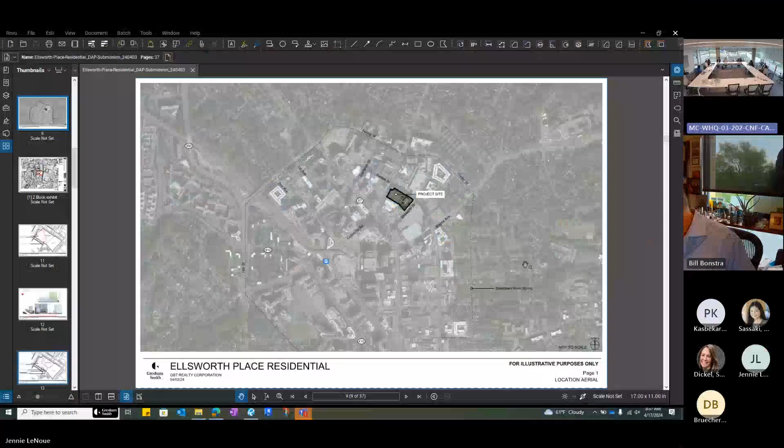I didn't realize you were also in the meeting. That works out, just make sure your sound stays off or it gets crazy. Yes, awesome, then we're good.

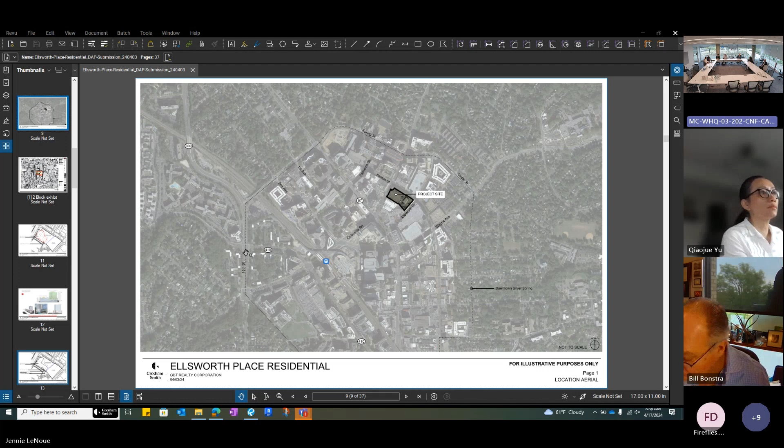So we can go through those quickly and then get to the revisions from the last time that we met with you. Again, just the aerial project site location in downtown Silver Spring, and a site plan showing that 2-block radius with the updated tower footprint.

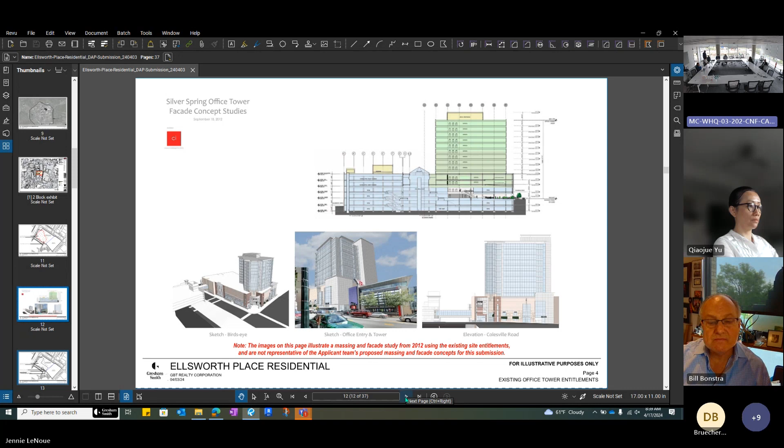Same sheet from before, showing what was previously explored for the office tower. This overlays the new footprint for the revised massing. Again, on top of the structure, you can see how we're interacting with and using as much of the existing structure as possible for the tower.

And we've identified the tenants that exist in these spaces. I know there are restrictions with regards to agreements with the tenants about what work can be done within the space. So our tower massing scheme relies heavily on using the existing structure that's there and what is available for the capacity of that structure.

There is a column towards the front of the building which we believe will be able to support some additional skinning as we bring that tower mass down to the ground. But again, that one does not extend above the structure.

We did engage a structural engineer in this last phase to make sure we understood what we were showing with regards to this extended mass and the cantilever we'll explore in a minute, and whether it was possible. What we know from him is, based on what we're showing, there is a limited amount of cantilever possible without getting into the existing structure of the building. But obviously further study is needed as the design progresses.

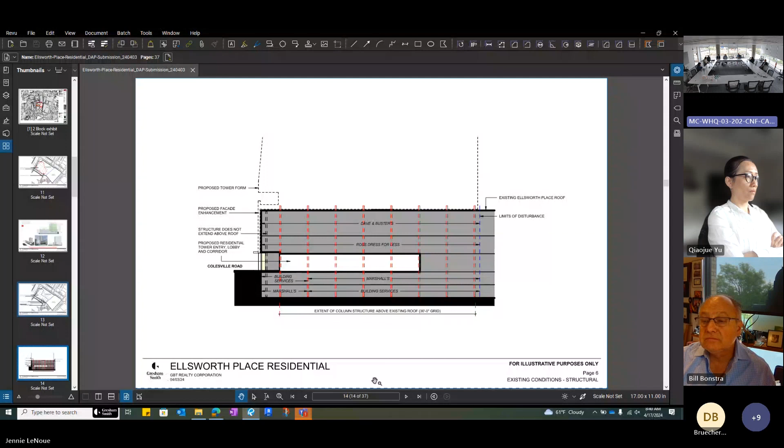This shows, similar to the previous submissions, the allowable height based on the full boundary of the building, showing the 300-foot allowable, the prescribed recommended step backs, and where our proposed massing lands.

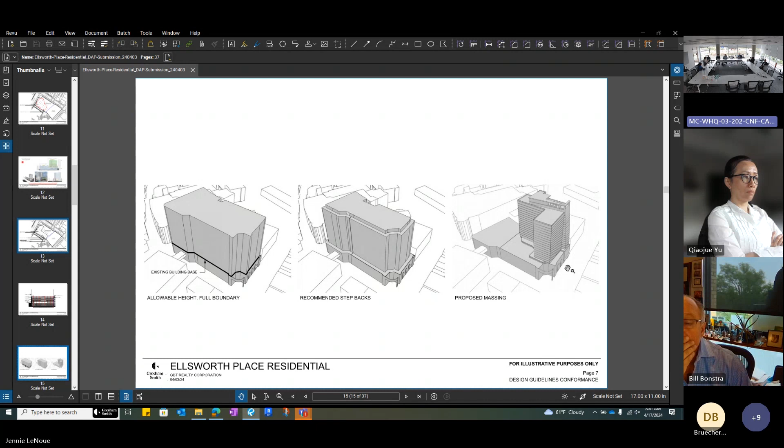We have maintained the L shape of the tower, squared off the corners, gotten rid of the rounded edges we discussed last time, and made a stronger gesture at the entrance to the residential tower by bringing out that leg — basically a rectangular volume — extending it up and having it wrap over the L form of the residential tower.

On the ground plane, it looks very similar to before. This dashed line is the revised tower footprint above. But the street-level experience is very similar to what we discussed last time, with emphasis on the residential entry through some sort of skin expression on the outside.

As we move up, you'll see we're making a small gesture towards that subtractive corner, with the building reaching out as you start to experience the volume of that tower moving into Ellsworth Place at the corner there.

This is the first level of the residential tower, programmatically very similar to last time — a lot of resident amenity space and adjacent outdoor amenities to activate both the Colesville Road and Fenton Street sides. At the amenity area, we're pulling that facade back from the tower mass above to create a subtractive acknowledgement of how the existing building meets the new tower.

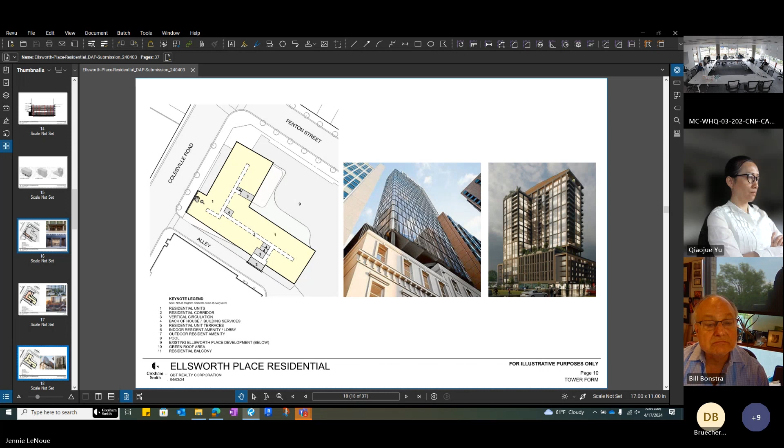We're considering this our typical tower footprint. The one thing that's not typical is that the side facing Colesville Road has essentially a zero step back at the ground plane and slopes back as the tower rises. So this face slowly peels its way back from the street, but this is essentially the L shape of the tower. As we get towards the top, we actually have this expression extending above the L shape.

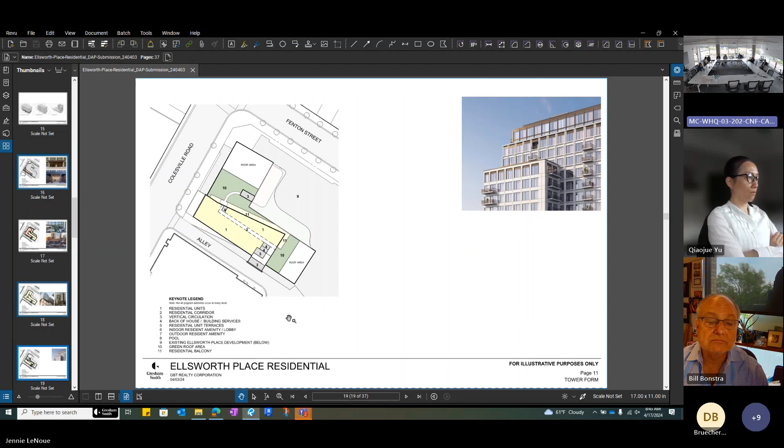This is still a purely residential floor. There are some green roof outdoor spaces, and that starts to separate this volume from the L shape. Once you get to the very top of the tower, this is now purely an amenity floor. We've relocated the pool from the back alley side of the form up towards Colesville Road, so now you have much more activation from an outdoor standpoint along the public side of the building.

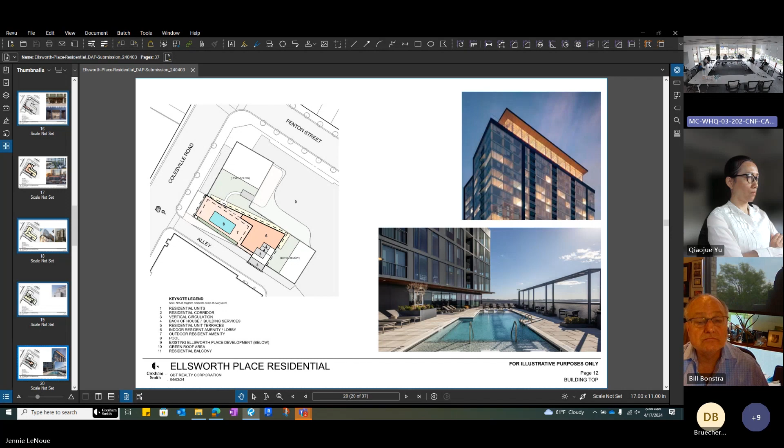This is just quantifying what those step backs are. Again, we're at zero at the mass as it hits the ground, and that slopes back gradually all the way up to the 25th floor. There's a step back at the first level of the residential tower that hits the existing building roof, and the level above that is where it kind of reveals itself over that subtractive corner.

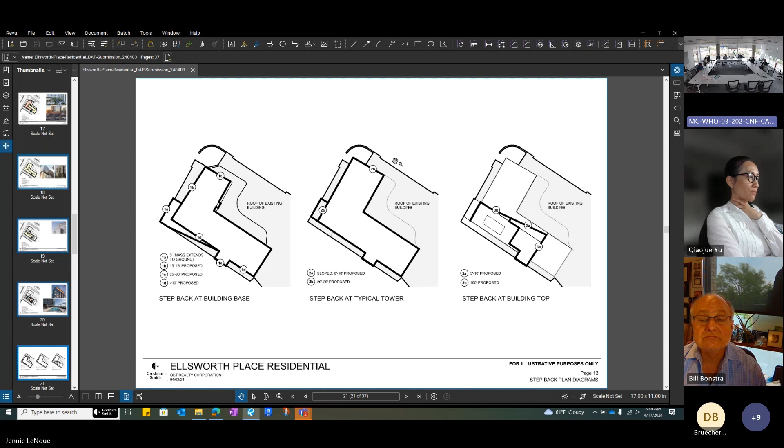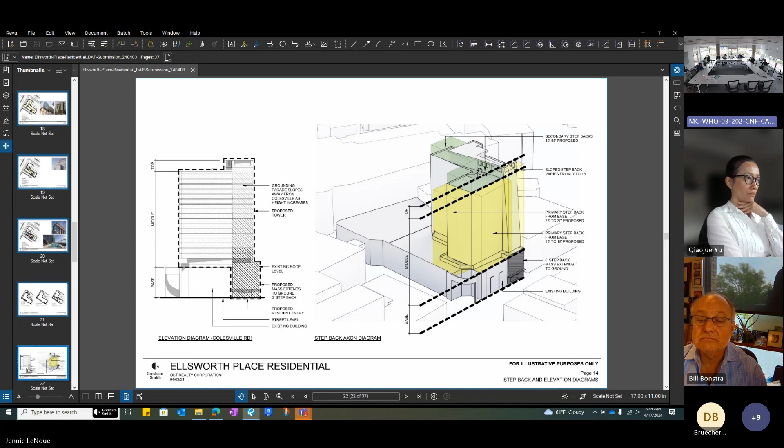Updated diagrams similar to what you've seen before, just showing how, based on maximizing that footprint, we start to peel away and reveal, acknowledging the prescribed step backs of 15 feet. But we've also heard that there may be some room, given existing conditions, to play with what that looks like, and that's where this sloped face comes in. It gradually works its way back, and then we have these larger step backs up at the top to emphasize the vertical gesture grounding the tower, and also to provide rooftop space for adjacent residential units.

The revised mass in context, and then again that overlay with the allowable heights. These are just that sketched mass overlaid with the existing conditions. They're not necessarily scientifically precise, the angles aren't exactly right, but we're just trying to show how we're bringing down that mass, emphasizing that entry, and what the tower looks like in context.

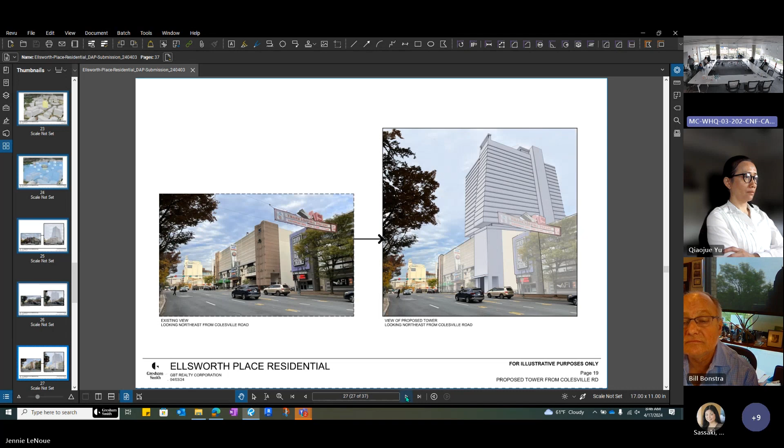So this is looking northeast from Colesville Road. Another view of that main entrance, along Fenton Street, where again you start to see that inside corner of the L shape. And this is at the intersection of Fenton Street and Ellsworth Drive, on the back side of our tower.

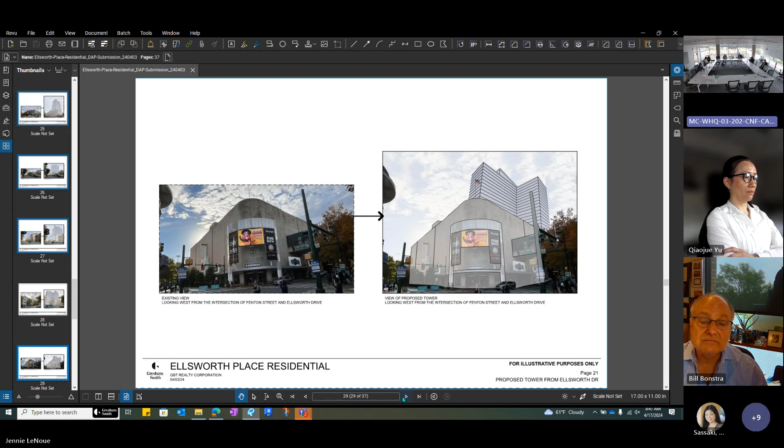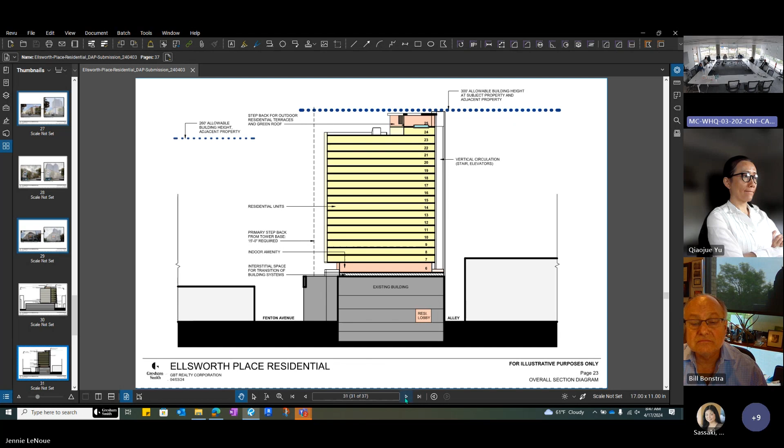Some diagrammatic sections that start to show that relationship to the street, to the subtractive corner. And then this section cuts through that residential lobby and shows how we're peeking out beyond that subtractive corner in the facade of the Ellsworth entry.

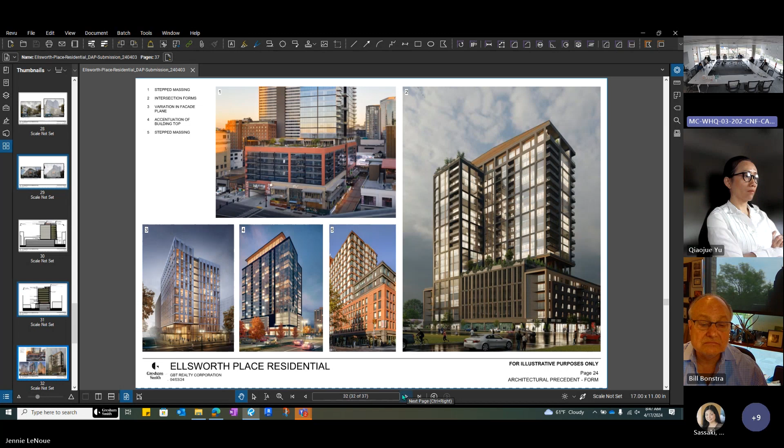A lot of this precedent imagery you've seen before, on our form now with the piece that starts to wrap the top, creating this lantern effect and cap on the building that wasn't necessarily as expressive before. Very similar patterns and fenestration, things we'll continue to explore as the design progresses.

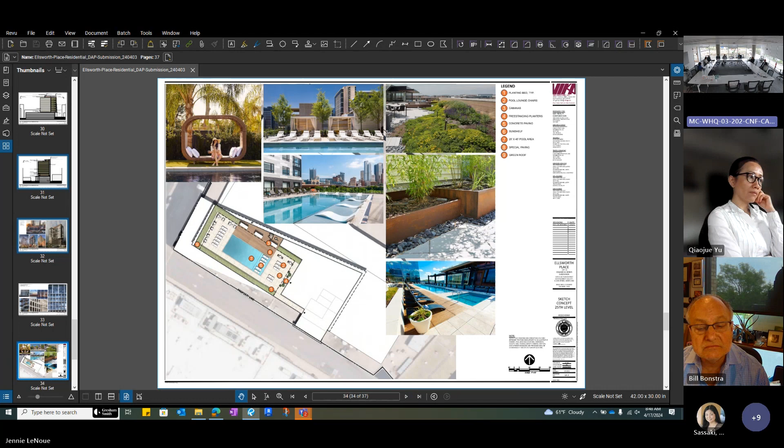Also, as part of this package, we've included some landscaping concepts from VIKA. These look at what the pool deck might look like at that top level, adjacent to interior amenity space, giving great sun exposure for the pool itself, views south to DC, and a place for residents to relax.

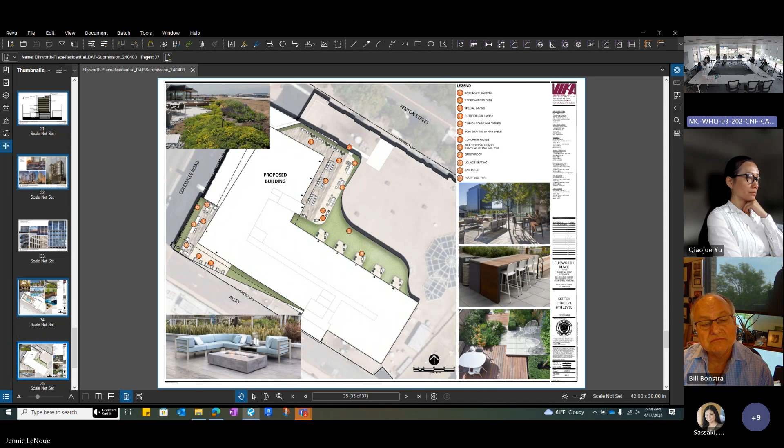At the roof level, the existing Ellsworth Place roof level, you can see patios adjacent to units, outdoor amenity space that supports the indoor amenity space and helps activate these edges. And this corner along Colesville where it meets the alley would also have outdoor occupied space.

Down at the street level, this starts to identify some maybe paving changes, paving treatments, and identifying some of the trees and sidewalk areas to remain.

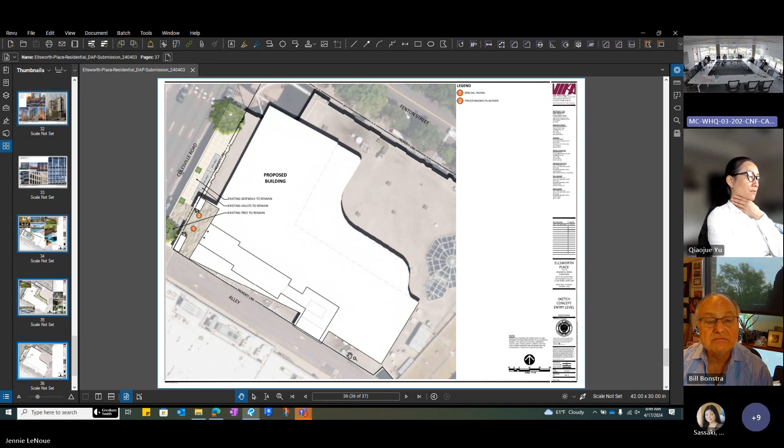This may be slightly out of order, but this is the level just below the top amenity level that shows a lot of that green roof and patio spaces adjacent to units.

So that's the package in its entirety. I think our focus was really on grounding that corner of the tower, cleaning up the mass in a way that felt less bulky. What we heard before was that it was competing a bit with the bulkiness of the base, and that's where making that separation comes in, like it's here.

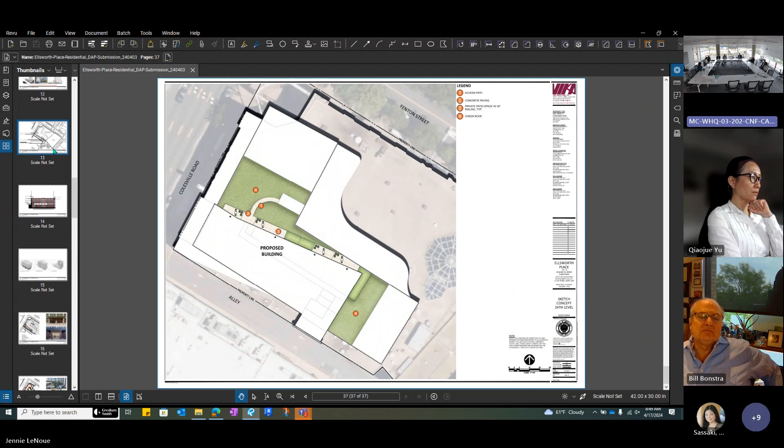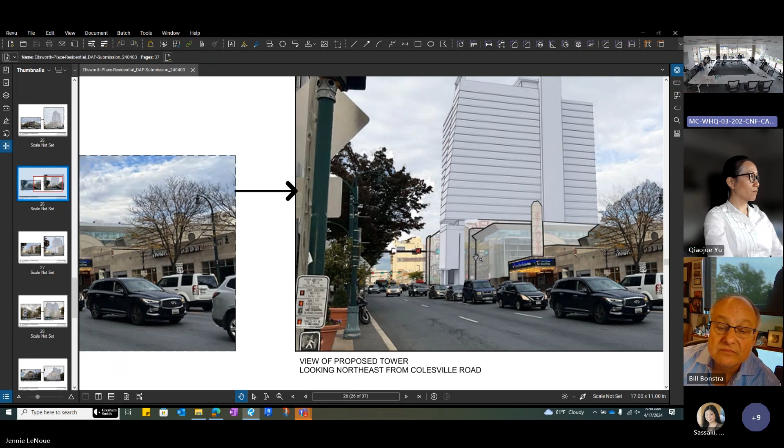Making the separation, the recess, that break between the roof, the existing roof level, and the story that's above that roof level, having that reveal, and having people inhabit that space as well. Make it a space that's occupied both inside and outside, to help create that separation and acknowledge the difference between these two, but have them work together.

So, get a perspective view looking from the north, from the street. Can you show that one? That one. This one. Yeah.

Yes, yep. I'd have my DAP members go first, but I'd like reactions to this versus the last presentation. I'd be happy to go first.

I applaud you for your efforts to respond to our previous comments, so thank you very much for that. My only point would be, as you continue to develop the design, anything you can do to make the north-south bar more dominant to the east-west appendage, the stronger I think the design would be. I think you've made great strides from the last time. In fact, when I reviewed the package earlier this week, I was like, well, what did they do? And then I saw the revised version this morning. So I want to commend you for that, but I also want to emphasize that, to my way of thinking and what we've been trying to communicate these various times, is the north-south bar should be more dominant.

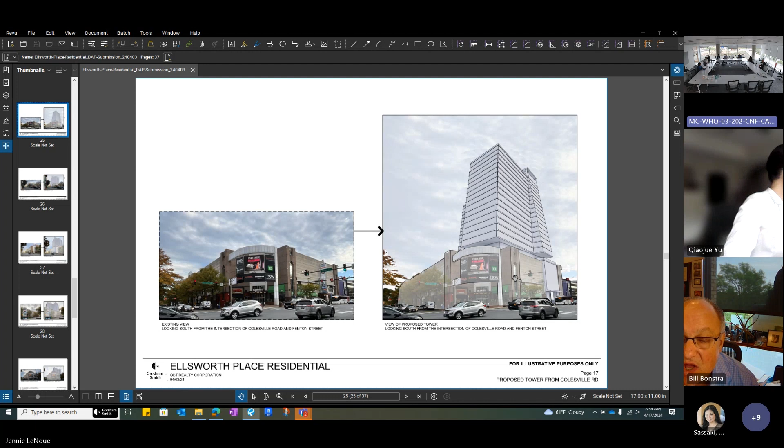I think the lantern, the top of this building, will be incredibly important because this height is a new height for Silver Spring. So how we can really emphasize that moment and celebrate it when you're looking from the metro, this is going to be such a prominent moment for downtown Silver Spring. When you enter from the metro, you'll see it right there.

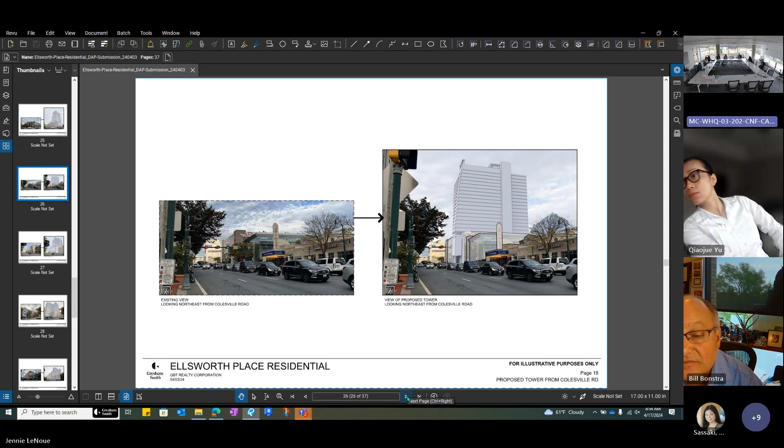So from this side, you start to see nice articulation from the lantern. But when you look at it on the other side and the other view, maybe the next page, I think thinking about what's happening here, what's happening on the roof, how that piece you were talking about sort of glowing, you can see it in some of the examples. I think those will be great precedents to refer to as we're thinking about what's happening there.

My only other comment, and I'd like to hear from other members of the DAP on this one, is when I saw the plan and the cantilevered bar of residential over our wonky corner, I was very skeptical, because when you're standing under that and you look up and see a massive 300-foot tower above your head as you're entering the mall, how will that feel?

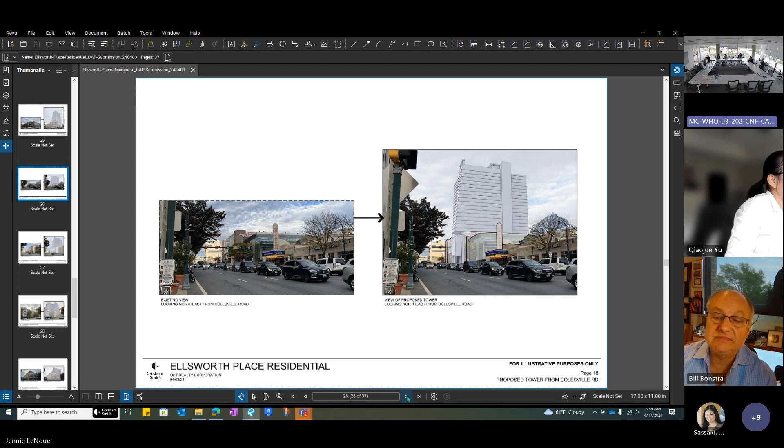I think that view we were just looking at does a good job, because you're recessing the level below it. I feel more comfortable here because it's separating it from the ground floor. So while I was nervous when I saw the plan progression, when you see it in the view, I feel a lot better about it.

But I'd be interested to see and hear from the rest of the DAP members what their thoughts are. And then also I'd be interested to hear from this team, are there plans to do anything about that corner on the ground level? Does the mall have any plans for the ground level? I mean, I know that would be a separate sort of thing, but...

It's a very challenging piece of downtown Silver Spring. But I think you resolved it well, ultimately, and you can tell from this view. So I concur. Okay, can I go next?

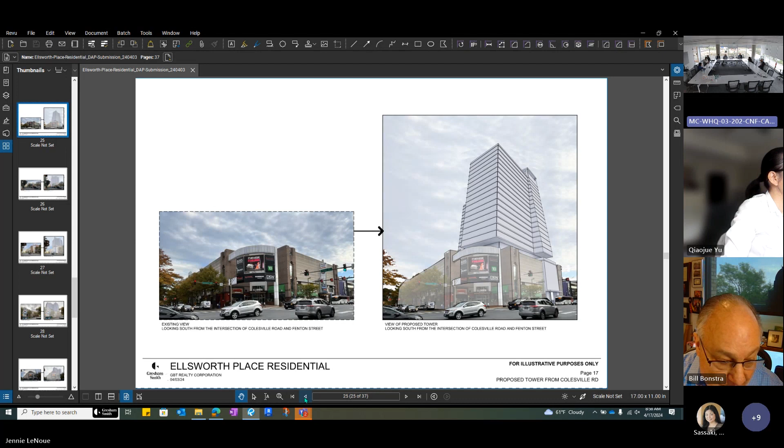No, that's not correct. We're not able to add additional columns that will support load above the roof of the existing mall. So we can support any fenestration that's on the mall itself, but on that corner, we can't. That's kind of why we had the cantilever sloping back, working with the structural engineer.

That was kind of responding to the comments from DAP and also satisfying the structural hardships of the building. So you really couldn't, on one floor, have a lateral transfer truss that picks that up and transfers it to the existing columns?

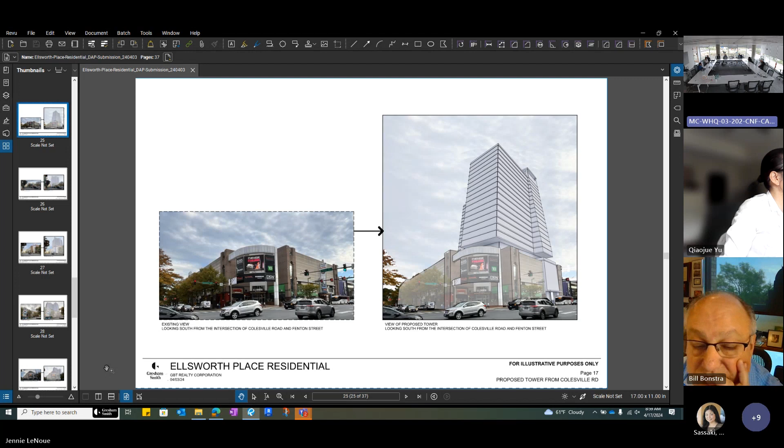It's quite challenging with the structure that's already in the building. We were challenged, and we had to work extensively with the engineer to try to figure out an option just to create this mass, to be honest with you, Bill. Right.

And does that corner need to project over the entry the way you have it, or could you put another appendage, so to speak, that runs north-south along the left side of that bar to give you more floor area, but back from the curve?

I don't know if we could go any further towards Colesville. Is that what you're saying? Appendage towards Colesville? No, appendage back to the left, bring that corner—I'm a little troubled by that mass floating.

There's nothing that ties it into void. Yeah, David mentioned the void at what we call level 5, right above. Yeah, is that what you're speaking? Okay, well, you have that overhang there. That's not the void I was referring to.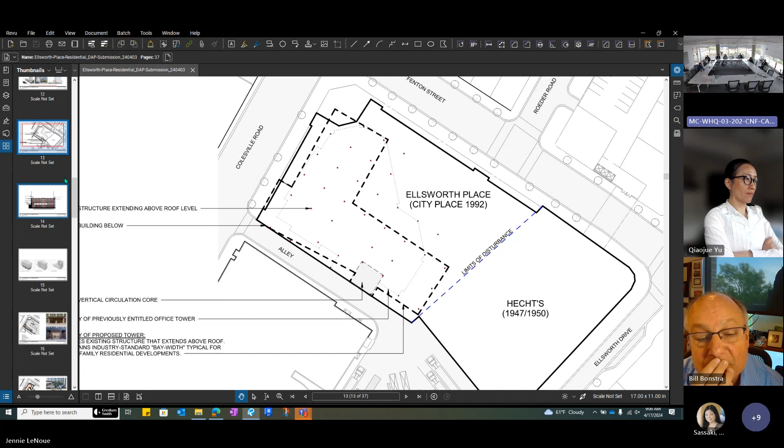I was referring to the void along Colesville. Oh, that, okay. Yes, right here above the entry, where the slope comes down—that recess is the one I was referring to. I don't mind having an outdoor space there.

I just think in terms of the way you develop the skin, you can get continuities there by punching holes into that rather than putting windows that allow it. I mean, that's an architectural opportunity.

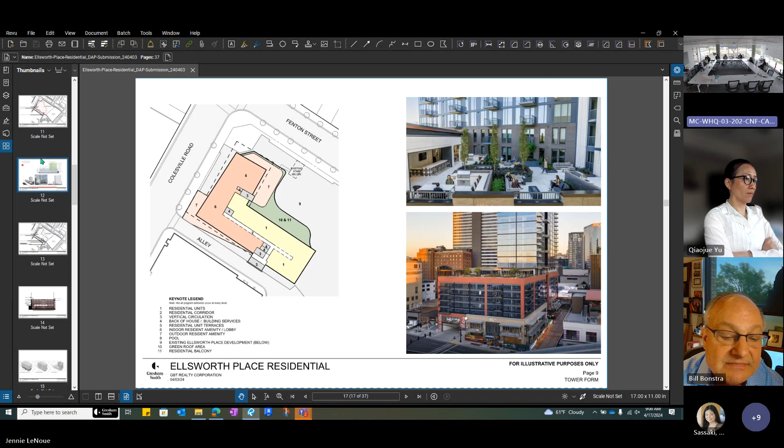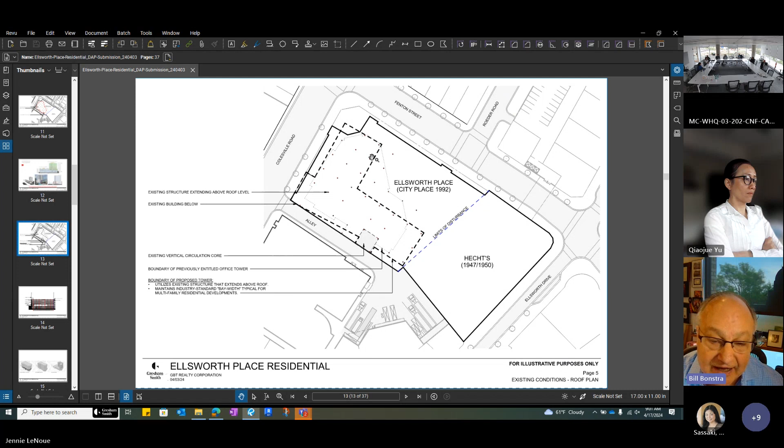So, Bill, can you clarify the corner you're speaking of? The primary corner projecting over and floating seems a bit profane to me. It would seem like that corner should stay tucked into the orthogonal building, and then you could have an appendage like what you put over the entry door running north-south, but not from the Colesville side, from the right side of that face. You see what I'm saying?

If you need more floor area, you run another floating bar down to give you more floor area, and pull that corner back.

You extend it towards Fenton. Yeah, there you go. And then have half of your residential bar continue without cantilevering over the void.

I think it's mildly troublesome to come in there with a building. All that building does is float, except at the alley. The only place it joins the ground really is at the alley where the core is. I would be worried - Alice mentioned the thinness of the building as you're standing at the northwest corner looking south.

If we widen that, it becomes more obtrusive, in my opinion. I know we are extending over that unique corner, but I think the uniqueness of that cantilever and the way we treat the bottom of that soffit could be an interest that is just part of that interesting corner, if you will. We don't know the commitment of the signage right now.

Sure, sure. My only point is you're not grounding the building except along the alley. Can you make some wing walls that ground it on the entry side that don't weigh a lot? Can you join that without cantilevering that appendage?

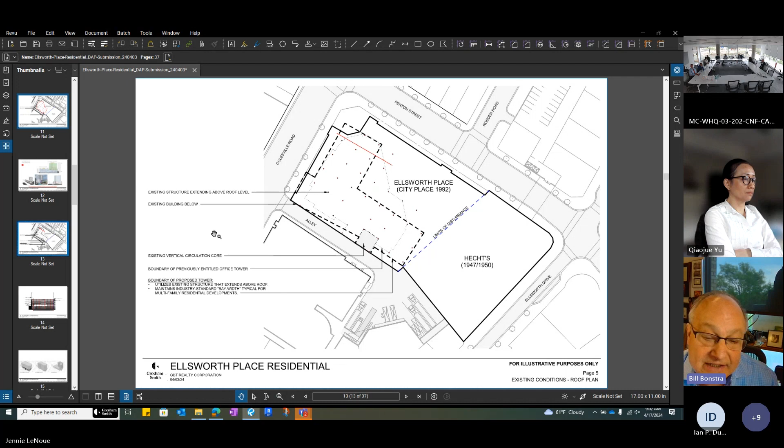Bill, are you talking about Colesville Road? The Colesville residential entrance - could that come up one floor higher and at least make a connection back and be plumb down to the ground? I mean, I don't want to design your building for you. I just feel like everything's hanging up in the air still.

I think one point that doesn't show here terribly cleanly, especially in the model - this is Ian at VIKA - is that the building is essentially on the right-of-way line. So we really don't have the ability to put anything structural in the right-of-way.

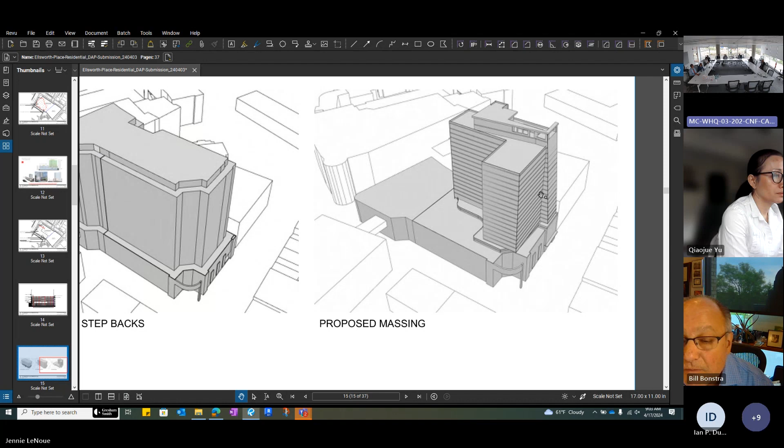Is closing up that void that David is speaking of - would that respond to your concern, Bill, on Colesville? There you go, that's the best view. You can zoom in on that thing.

It is hovering. Does there need to be anchoring on level, we'll call it level 6, right there where the cursor is? Well, it's sort of contradictory. I like David's comment about that glass and hanging it.

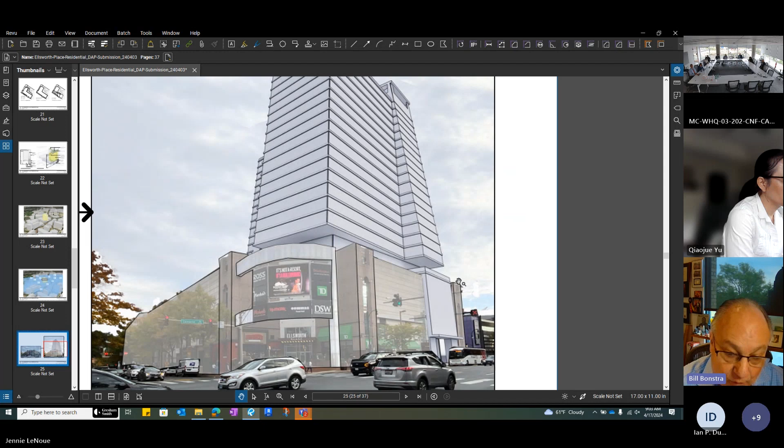So I was suggesting that the main bar not have a void underneath it and not cantilever, and be pulled back. But I'm not sure - these are big moves. And could you connect it?

Yes. Could you bring the entry along Colesville one floor higher or two floors higher? I think that would help ground that piece in some way. Because it's still floating above - it's a building floating above a shopping mall. You haven't accomplished the connection, in my opinion.

That's all I'll say. I think Bill and I are saying the same thing - it's just how you go about doing it. You can either go about it by raising the void one floor up, or find ways to enclose that void while still keeping it open and lively.

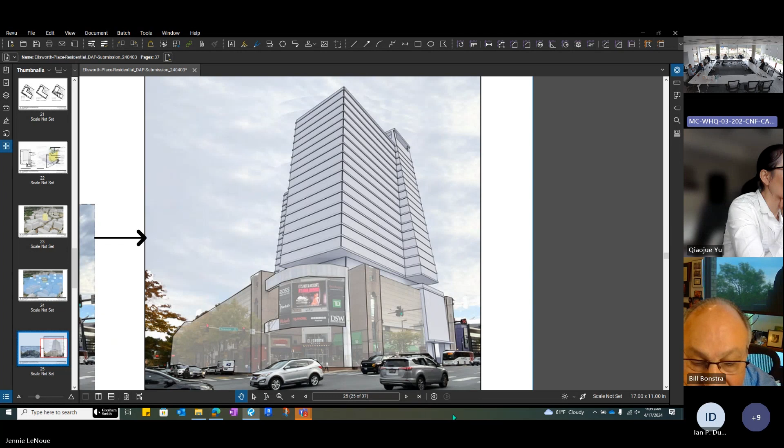I think there are many options there, but as I understand Bill's comment, what we're trying to communicate is that the north-south bar should be rooted to the base in some way, to allow the east-west leg of the L to feel lighter, subservient to that primary.

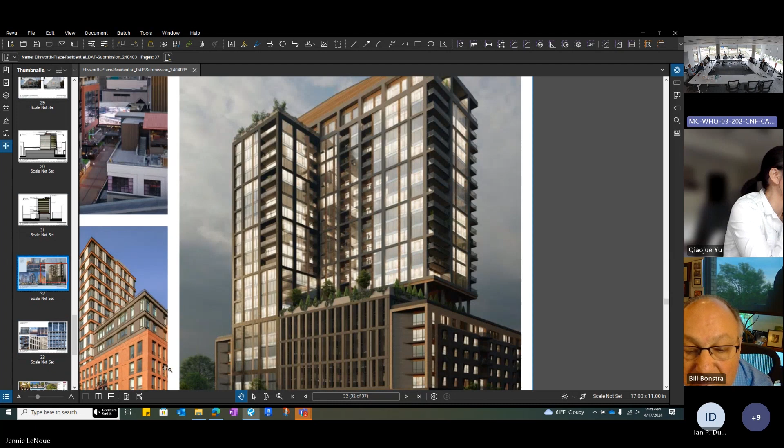If you go to your first precedent book, down a couple - I think it was that one. Okay. That big one right on the right side - I think that begins to speak to what's being said right now.

There is a part of that tower that is kind of floating, but there's also a portion of that tower that anchors to the ground. And I think right now that is not occurring in the design of the tower that we're looking at.

That's a great example right there of just what I think needs to happen. We've said we've liked that image a lot since the beginning - that was the precedent that I think we embraced as a diagram, right? It has to ground itself in some way, and it's still not doing that.

I like your comments, David, I agree with what you're saying. I like the glass maybe floating, but the body of the building has to somehow not float as well. Can't all float. Alice.

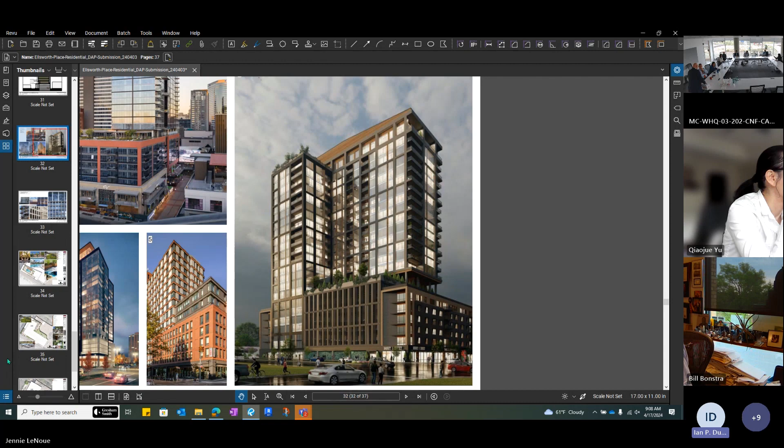We do have in the latest submission, which was on the 26th I think, an indication of what we were planning to do, which is essentially replacement of pavers at grade at the residential entry, to demarcate the new residential component that we are adding to this project.

So this will come back in site plan in more detail, right? Yes, okay. I think we'll defer a conversation on that so we can focus on the building massing for today, but we will have to come back to that during site plan.

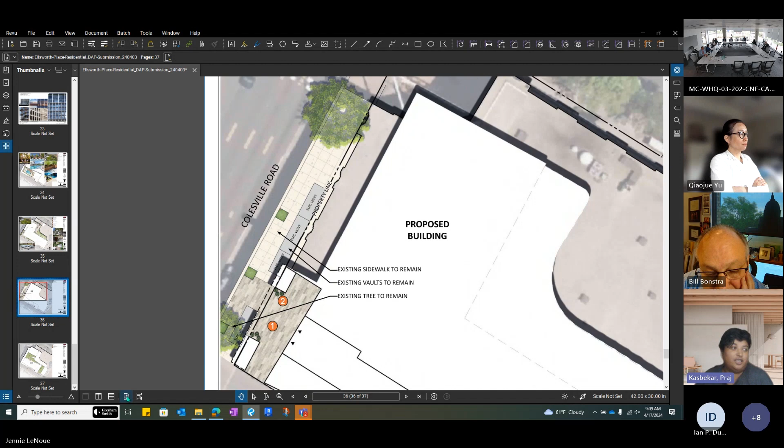Praj, do you have anything to add? Yes, I actually really like that it's floating. It's kooky—that whole mall is kooky. So for me, I think it's a little bit whimsical, and walking around it, I actually think it could be a great kind of more modern look to that corner.

Also, I want to echo Qiaojue's comment. At this level of the third submission, I feel like, thanks to the applicants, they have responded to a lot of the comments about massing, trying to have some individuality from the mall while also speaking with what's there. I think great strides have been made on the massing and how it looks off of Colesville and how it comes down the alley.

So for me, the facade play—I think after this stage, more of the skin treatment and what else can be done to respond to some of the concerns of the other DAP members could address those concerns. I was actually going to ask you: at this stage, we look at where they are and then what's our next comment. For me personally, I'm totally okay with this submission package, and of course I have comments about the massing and facade treatment, the design coming all together. But I personally like it.

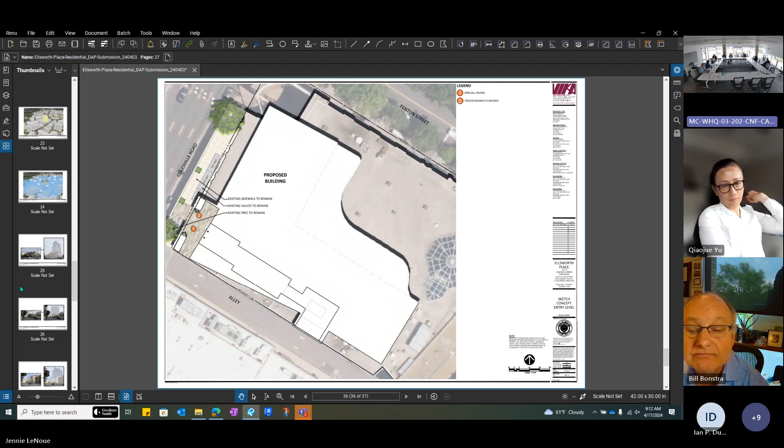For the sketch plan, I want to go back to the corner of Fenton and Colesville, because I think that's the piece Bill was commenting on. I wanted to clarify a couple things he was saying. As David mentioned, there's a number of ways to address the connection to the ground. We have a lot of challenges here because of the structure. But since you're remote, I drew it so I can sketch things and show them. Just what I think Bill was sort of talking about was...

Are you in the meeting? I'm not in the meeting. But you're sharing the screen, right? Maybe you can see, I just kind of sketched it, I'm not as adroit at digital as you are, Alice.

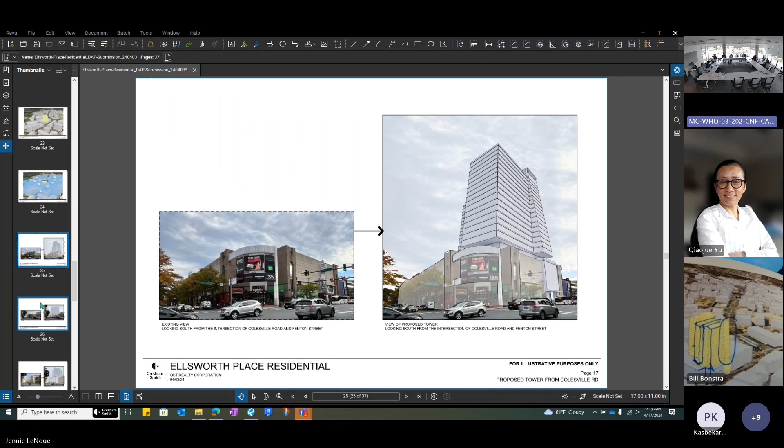So I do things with just a pen. That's what she did too, mine was just a digital pen, Bill. But it might be the same thing that we drew, because it's thinning out the tower going to Fenton, using that as your cantilever, and then pulling the cantilever off from floating over that entrance to the mall. Can you take a screenshot and email it to me? Can you see my sketch? Can I airdrop it to you? Yeah, there it is.

See, if you bring back the corner and create another, I mean, if you're creating appendages, and we're okay with that drawing. Your minds are alike. Plan, you did it in 3D. We're on the same page. Awesome, Alice, I know I like you.

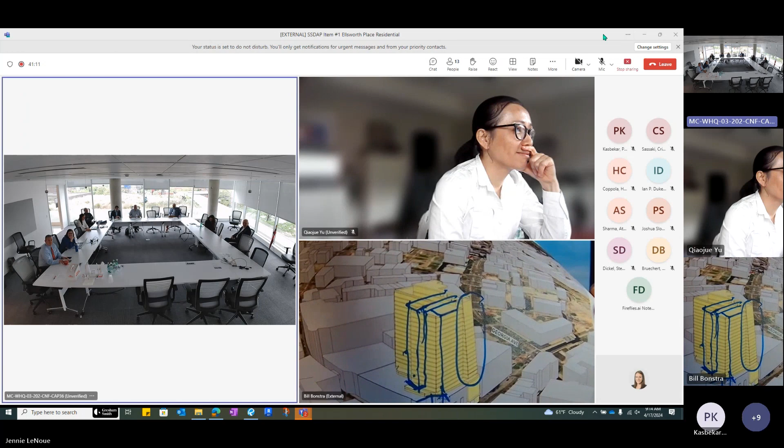But that's how you make the corner without getting all wonky. I'm a little concerned about wonky buildings, and look, I'm not a structural engineer. I know I could fix that slanted face, but I'm not going to go further on that. That's how you'd solve that problem, maybe, have that, as David was saying, a building has a body and it has appendages, arms, and the arms may be lighter than the body. So that may come in the next iteration with massing, because you're articulating it the same way in your SketchUp model, which is always a problem.

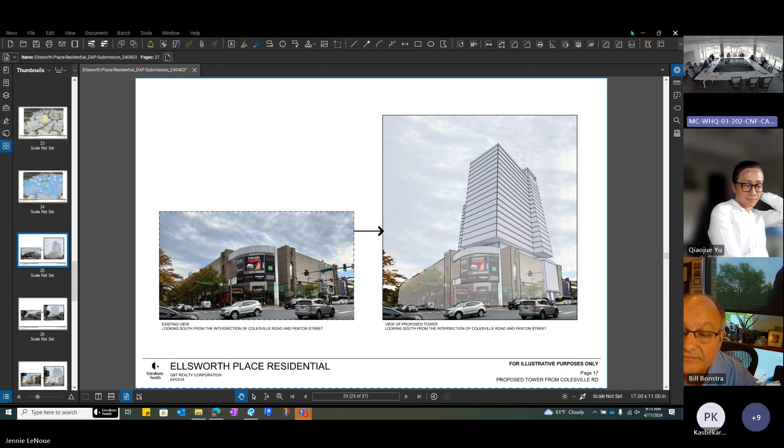I think one of the other things I appreciated in the new presentation was that the roof amenity space, you're trying to focus it towards Colesville rather than the other direction. I think that's a great move. I also think that you step it down going to the east as another move. I think that is a very good move, because looking at this tower, and maybe it goes a little to what David says too, about the north-south being dominant, when you're going to see this tower from anywhere to the south, from the metro station, Ellsworth, anywhere around there, you're going to see it from the south. It's going to be a very prominent view. If that tower can somehow step down in profile, I think it will help that view tremendously and how it meets the sky. I think what you're suggesting begins to do that. So I think that's a very good move as well.

So step down the tower, you're talking about the eastern face, projecting at. So that when you're looking from the south, you're looking at the amenity, which is kind of an iconic piece at the top. And then it begins to step down towards the rest of the city and towards the Fenton neighborhood. I think that's a good move.

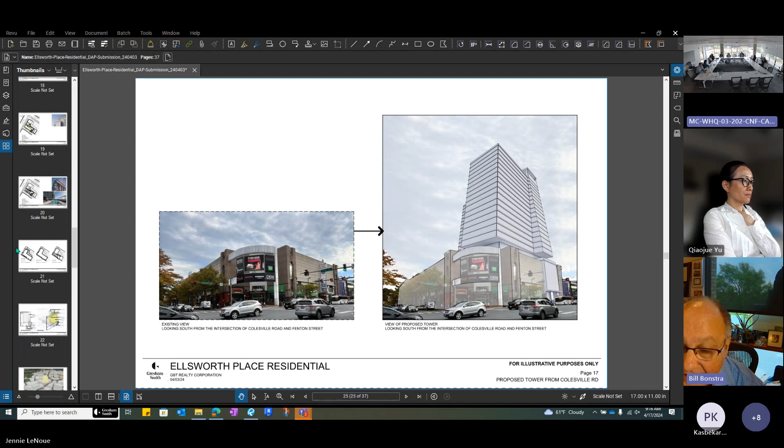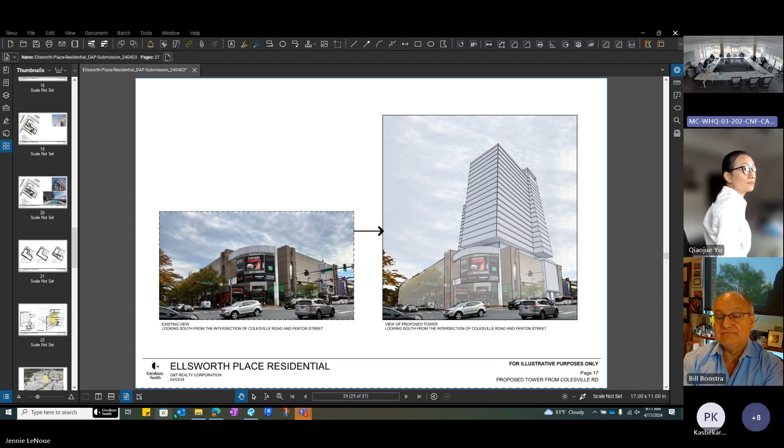So east of the core along the alley, it steps down a little bit, and I think that's what they're proposing. Yeah, that's good. Because that goes all the way up, right? Yeah, and to have some relief on that southern elevation so you're getting more movement up and down, where on the north-south elevation you have pretty much more of a solid kind of mass that you see at the top as well. I think that's what you're doing. I think that's a great move.

Yeah, the one thing with that perspective right there, I just think something needs to bring it, attach it to the ground. That's the one thing that's missing.

To the architecture team, could you bring the entry mass that's vertical two floors higher, actually connect it? That's what Atara suggested, and that's good.

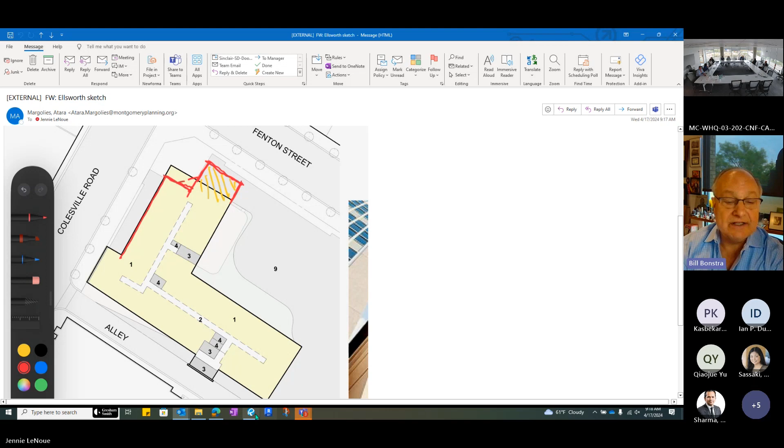So Bill, you're asking about the entrance piece on Colesville. Essentially, it would have to be a screen though, right, because of the structure. It could be, and then you could fill it in with some lightweight material. It doesn't have to weigh a lot, it just has to make a connection, and then maybe that glass base sits on top, and maybe it doesn't have to be angled. You could make it just a small relief that goes up. Maybe that's the way to do it.

And then you would have a better visual connection of vertical planes, that may help.

Go ahead, Bill. I'd say you've broke it at the same height as the existing mall, so it doesn't really accomplish that connection. It's just an element on the streetscape. See what I'm saying? So maybe you have a little extra load that you could put on those columns and get another two floors of a screen or something, as Atara suggests. It doesn't have to be a big solid piece, but some kind of connection. That's all.

Just going to make a dangerous attempt to summarize, but I think what we're trying to communicate is that if we look at the north-south leg of the L, anything you can do to emphasize that, strengthen that, give it more height, and connect that to the ground, the better I think the design is. And then that allows the east-west leg of the L that projects towards Fenton to be less dominant, and that will help the massing.

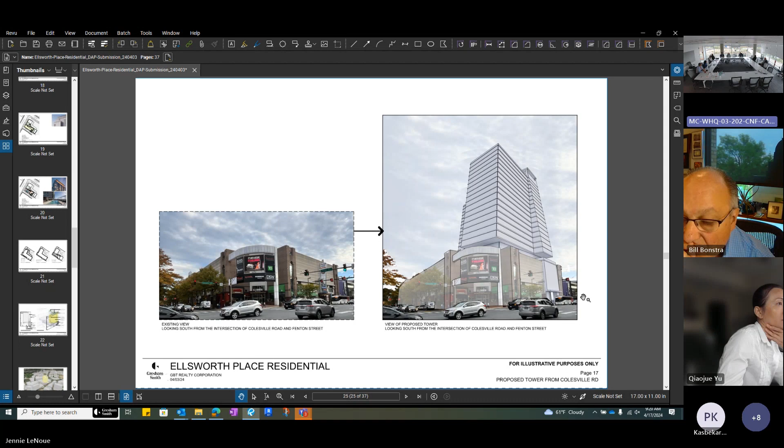So with that, the DAP members have to agree on what the next step is. I think we were in agreement here in terms of comments, and I think that's great. And I think it's clear everybody appreciates the work the team did to advance the design. The question is whether the DAP thinks we have to see this again, or say it's okay, we can allow them to proceed and we will see it again once they're into site plan and past sketch plan.

I would support that they move forward to site plan. And I base that decision on the fact that they've listened attentively to what we've said in the past, and they've made progress with the design. I would anticipate them to continue that progress based upon our comments, and therefore I think what we're talking about is a strengthening and emphasis of a direction they're already pursuing.

I would second that. Do I second? Yeah, we should need to get sort of, I agree, everyone needs to vote on that.

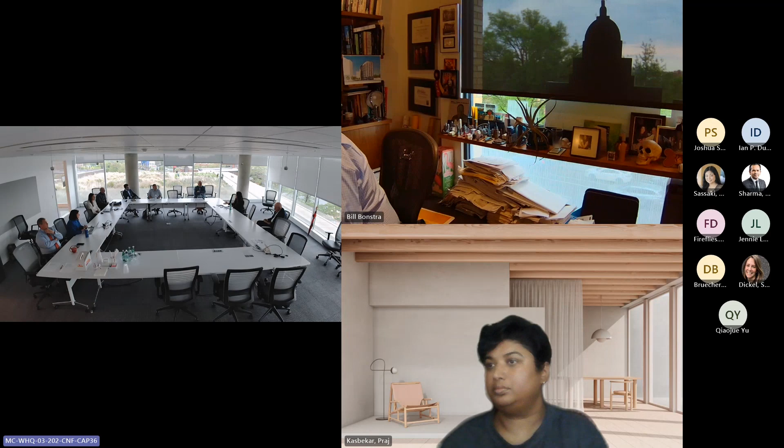I do think that some of the massing moves around that corner of Fenton and Colesville will be very important in our discussions moving forward. But I think the responsiveness is clear as long as we can continue having that conversation, because I know there are always decision points as you're working through buildings, and we don't want you to move to a point where it's very expensive to go back and make edits. I think there will continue to be comments around that corner, but I feel comfortable approving to move forward to sketch plan.

Site plan, sorry, from sketch plan to site plan. Yes, we are submitting for site plan, and design will have the sketch advanced from that plan. Okay, so that's two votes for letting them proceed, we're seeing them again at site plan level.

How's everyone, Bill, Praj? Same here, I agree. Yeah, I agree with proceeding.

I would also say, talking about their efforts on the structure, they are limited to what they can structurally do. So I wonder if it would be helpful at the site plan level, or as part of the design analysis, to show what we can and can't do, so we don't get into the same discussion about how it should look. I'd put that as a footnote, if there's a report or analysis that explains why the design or massing is the way it is.

Okay, thank you. I would just add, I've seen structural engineers do some great things. There's a building at the corner of 19th and N Street where they built a truss at the roof level and hung the corner, with no surcharge on anything below. That's Herculean in nature, and maybe there's a better way here, but I have great confidence in structural engineers to solve a lot of these things. If you say it's not possible, we'll have to trust you there.